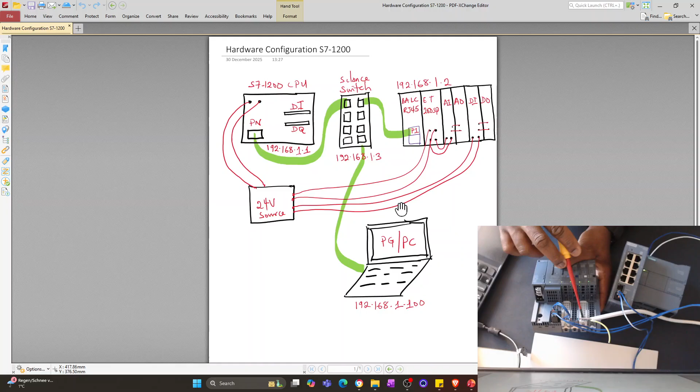So to quickly explain what you see on the ET module, there is a 24-volt external power supply coming to the main module, this guy, and I'm able to loop power supply from this to this white base station. This white base station then supplies the dark base station, so I don't need to connect power supply to this. I also have another 24-volt power supply connecting to this white base station, and then this white base station connects to this guy.

These remote I/O stations are connected on the side, and there is this device which terminates the bus line. This is a server module. It terminates the system. It lets the device know that this line is complete. We're no longer connecting any other thing. You see, when I remove the device, now we have the red light blinking on this module, which is saying something has been removed on the line.

So these devices are connected on the side. I'm not supposed to remove this while it's powered on, but because I wanted to show you, I'll just do that. So this guy connects to this guy, and that's how the power is from this. You see these three lines? The power is connected from here, and data information is connected from this top part of the module.

Because we have power supply connected to these guys, you can see that there is a power light on here. There's power on, and because this guy shares power with this, there's power on here. If I take out the power supply from this guy, see, the power light goes off, which means this line, these two bases do not have power supply.

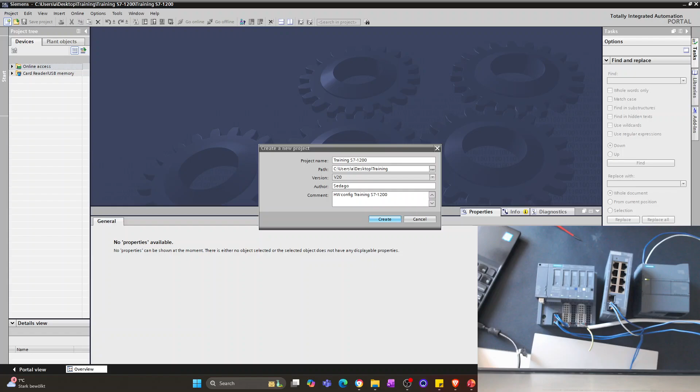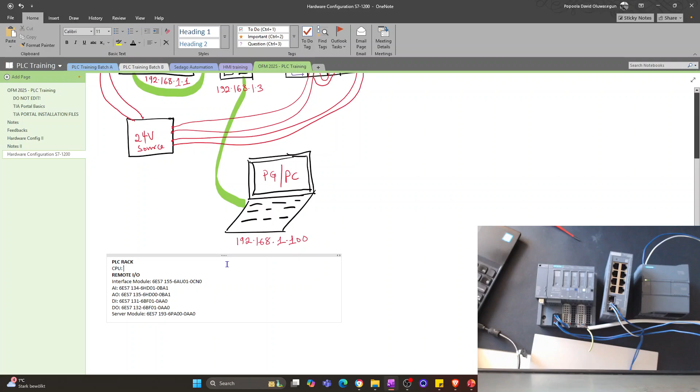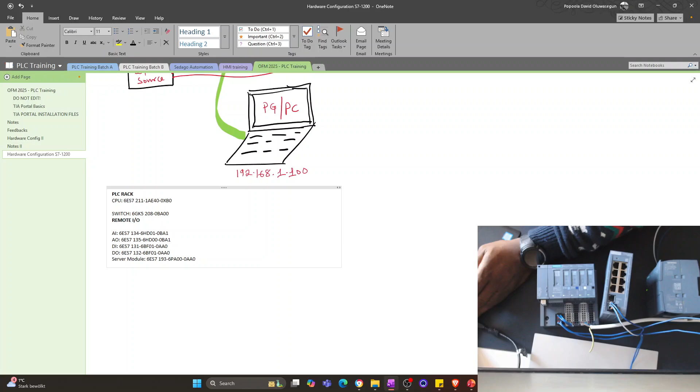Okay, so we have our system right there. I want to open this file where I've already tried to copy the order codes which we would use. So I'll just quickly show you that here. So we have our CPU, the remote I/O, and interface modules, and all of the devices are here. So I'll remove this. Our CPU order number, I'll just quickly type this in here: 6ES7 211-1AE40-0XB0. And then the switch, 6GK5 208-0BA00-2AB2.

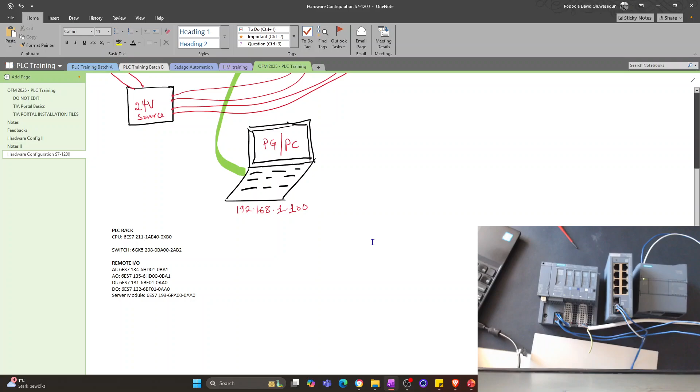In some cases, you could have the devices in front of you like this, and you have to do the hardware configuration. For example, if you're standing in front of a control panel, you have to read out the order number on each of the devices. In some other cases, you have a wiring diagram with all of these numbers, and you have to figure it out. Just like I've drawn it like this, a wiring diagram can show all of this with the order numbers, and then you have to program that. I've also included some IP addresses here. We'll get into that soon.

So let's go into our software to program. One of the first things we need to do is add new device. We know it's an S7-1200. We can directly search for it because we have the order number, right? So what we have here is DC/DC/DC, so it should be somewhere on this line. Then I'll confirm with the order number we have: 211-1AE40. This is it.

We need to be sure this is 211, right? Here is 212, so we should be somewhere here. Yes, should be this. If I click back on this, 211-1AE40-0XB0, yes. On the description, it tells you basically everything this guy can do. You can also check the version which you want to install. I'll just go ahead with the latest version 4.7, which the software has given me. So I'll click on OK.

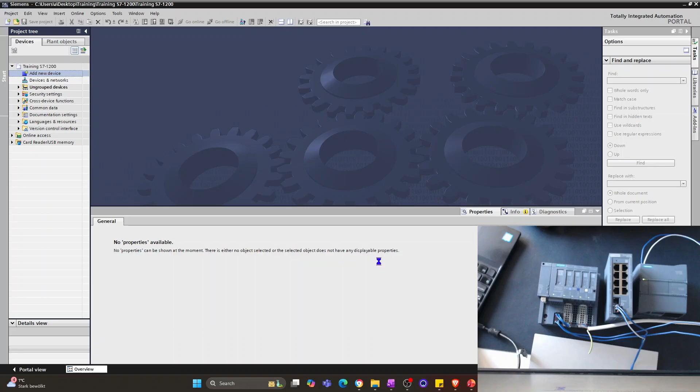And then it will add the device to the system. It will create all the properties of physical devices that the PLC can connect to. It will create the hardware catalog of the devices that can connect or work with this PLC. Basically, the software will prepare the environment for me, which we can use to program this PLC itself and everything else that can connect with it as well.

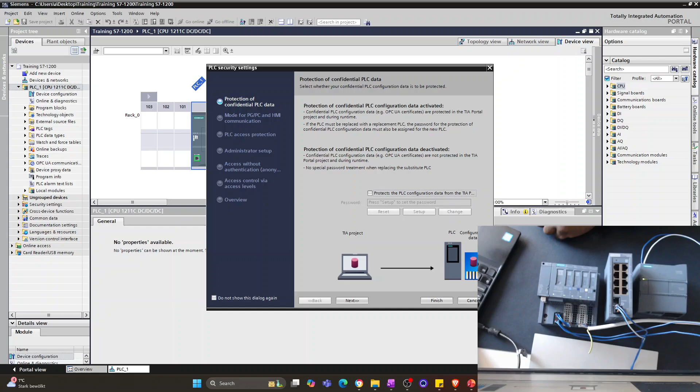Okay, good. So we have our PLC, and then once again it comes up with this: protect PLC configuration. So I basically click no, I don't want to protect the PLC configuration. We had this in one of the classes earlier, and there we needed to protect the PLC. There we showed how to protect the PLC. In this case, I don't want to, which was one of the issues some of you had.

Mode for communication, only allow secure communication, fine. Enable access control? No, so just disable access control. It will delete all online user management data on the PLC. Yeah, I don't want access control. Just allow people to be able to access this PLC, for training purposes, right? I don't want any administrator setup. Access level: full access, no protection.

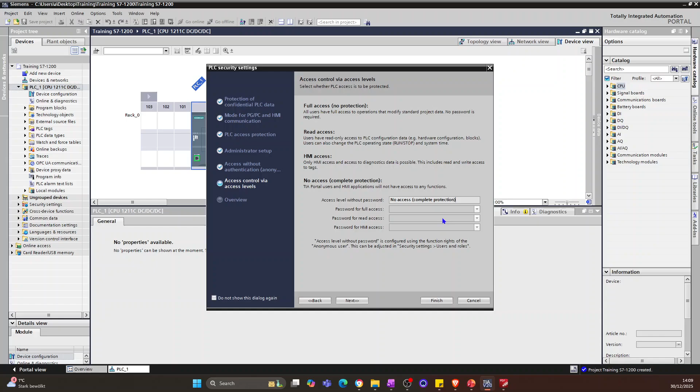TIA Portal users and HMI applications will not have access to any function. Password for full access, password for read access. Let's continue. I don't want any. Finish. So we have our PLC. It goes back to this protection. I don't want any protection. So let's see what that gives us.

Like I mentioned when we started this series, this is my first time using version 20, so we will be learning some things together. Like I usually say, it's best that you name things, because once you start programming, those names will help you. There are some higher level programming tasks where you need all of these names. You need port names, different naming. So tags, putting names on devices really helps.

So I'll just quickly name this as our S7-1200 training PLC. So that's named. We have a PROFINET interface, just X1, right? I'll name this interface as well. Usually I like to do that. So we can say PN, or we can say CPU PN X1. Now, new subnet. So we want to add a new subnet. I'll show you what this is later.

IP address. Let's check in our documentation. What IP address did we decide to use? 192.168.1.1, subnet mask 255.255.255.0. Yes. Generate PROFINET device name. Everything else looks good for now.

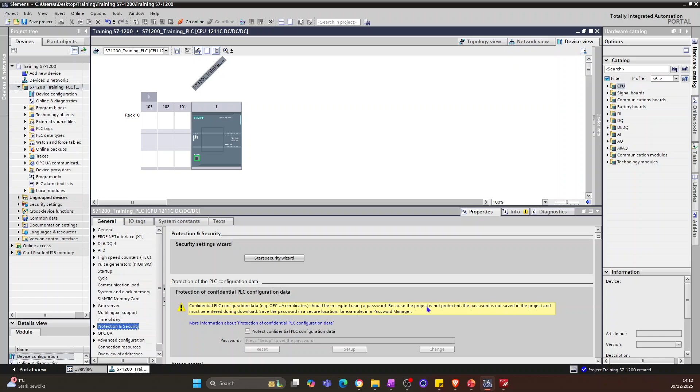Multilingual support and then time of day. I always advise you use the time of day for wherever you'll be using the PLC, because it helps. Protection and security. Again, it's saying confidential PLC configuration should be encrypted using a password. Because the project is not protected, the password is not saved in the project and must be entered during download. Okay. So, protect confidential PLC configuration. Let me just do this setup. I'll just enter something, at least 10 characters. Again, I don't want to do this. So let's see what happens. I don't want to do that.

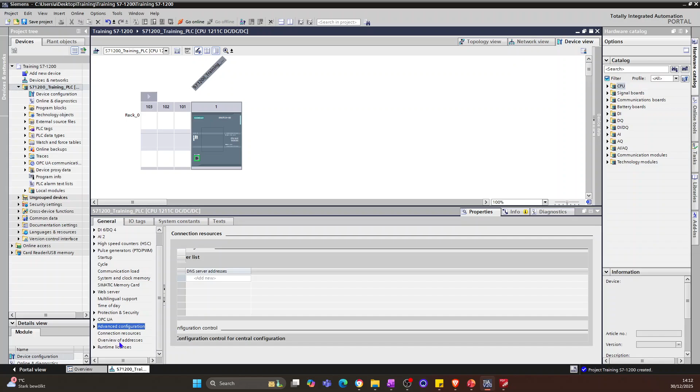OPC UA, yes, let's activate the OPC UA server. Probably we might come to this in future trainings. So I'll say yes, activate. Advanced configuration, for now just leave it. Connection resources, overview, and then runtime licenses. Of course, because we've enabled OPC UA, we need to mention the type of license. Here it says basic, so just give it basic. It's usually available over there. I think for now we have the majority of what we need to configure.

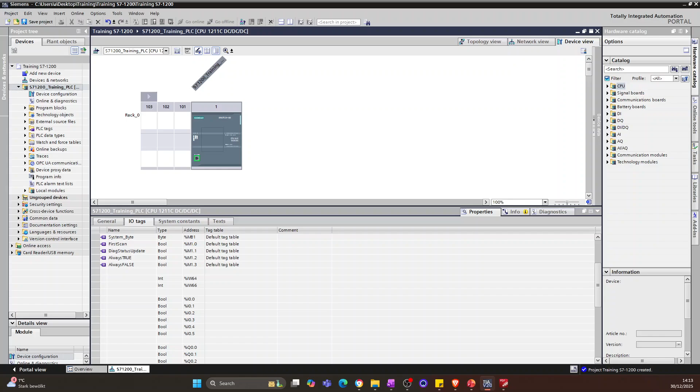If you look at the IO tags, it shows you the clock that we enabled. This is the address that's generated automatically for our analog input addresses, the analog input that comes with this PLC itself. Also, it's generated some addresses for our Boolean inputs, which is 1, 2, 3, 4, 5, 6. These are the outputs, 4. So we have 6 inputs and 4 outputs, basically. We will come to tag tables and all of this later. I think for our PLC we're fine.

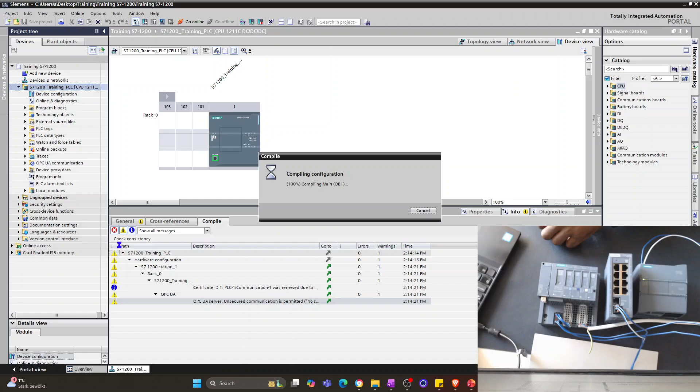So one of the first things we'll do is click on this. Let me expand this a little. Click on compile to see if everything we've done works, and then we'll keep an eye on the info table to see if everything looks good. Like I usually mention, these 3 icons are enabled so I can see errors, warnings, and information. Currently, 0 errors, 1 warning. The warning is that unsecured communication is permitted. Fine, no security is activated. PLC communication was renewed due to changes to the hardware. Fine. So everything looks good for now.

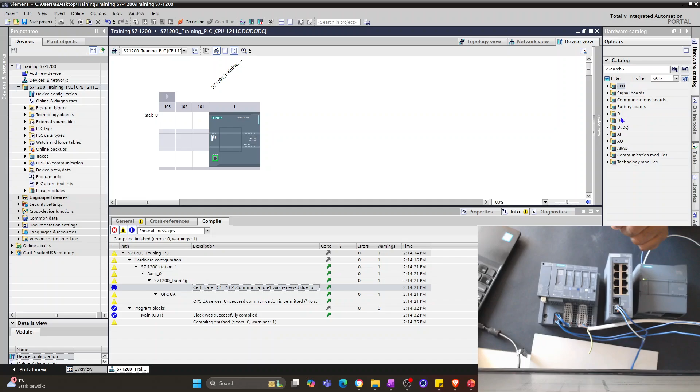Now we have to add these other devices, and because we will be connecting to them using a network connection like we've shown here, I'll just go to the network view. In the network view, you see a different view of the PLC. Again, let me go to the device view. On the device view, you see what we can see here in the catalog. It's showing us the CPU, communication boards, digital input, digital output, different devices that you can add on this rack.

However, when you go on to the network view, it shows you what can be on the network with this guy, not on its rack. So for example, when I go to the network view, it shows me the PLC, which is currently sitting alone. And here you can see all other catalogs. Let me close this. You can see that what you see here is different. Let me switch so you can see it properly. This is what we see when we are on the device view. When we're on the network view, this is what we see: things that we can connect to this guy using network.

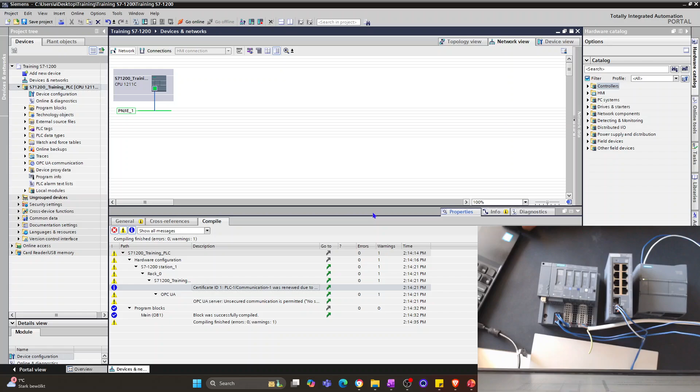So first, I mentioned when we created subnets that I will come to this. So the subnet really shows up when you get into the networking process where you want to network the PLC. Like I mentioned, I usually like to name things. So I'll go ahead and name this subnet which I've created. So I can say CPU subnet. Just name it directly like that. Basically, that's all I just want to do here. Every other thing for now remains the same, right? So here you see the CPU subnet.

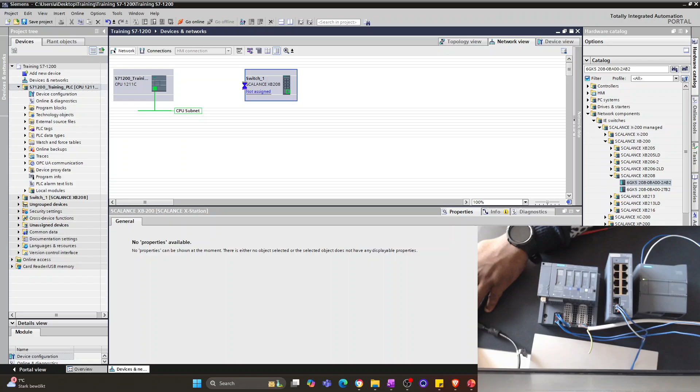Yes, so we find it. So I'll add it. I'll just put it on the network there. Okay, so it's there. And now we have our switch. So let me name it, right? So let me say network switch. We know it's a network switch, but I just like to name things, right? Good. When you click on this again, you can also name it however you want. So let me just say Scalance switch. I have a spelling error right here. Yes. Enter. So we're renaming things now. See? Yeah, Scalance switch. And it's telling us the type.

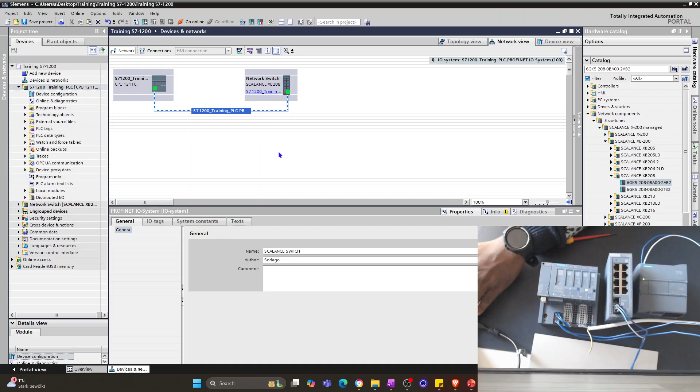So here it's telling us that this guy is not assigned to anything. Nothing is managing it. So here I want to assign it to a controller. Of course, I want it to be controlled from this PLC. So I'll just assign it to this. And when I click on that, it generally automatically enables a connection between both. Now, if you look at the PLC and the switch, there is no physical connection yet, right? But in the software, it already tells the switch that the switch will be managed from this PLC.

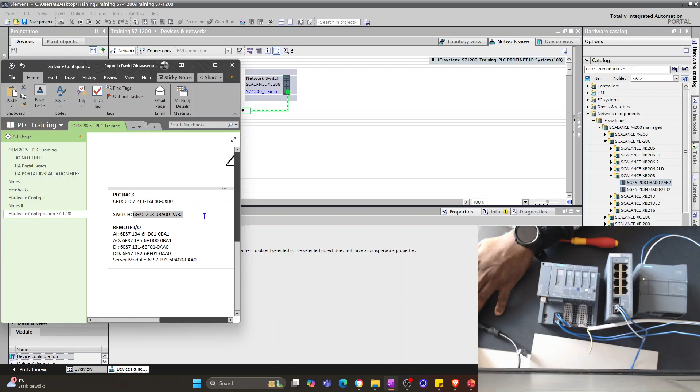So that's fine. We're still on the network view, and now we want to add all of this, guys. So I'll just put this somewhere where we can do copy paste so that we don't take a lot of our time. Okay, let me put it on another screen. Yes. Okay, so our interface module is this. I'll copy and paste it here, search for it. We want it on the network. Good, we have it. So we add it to the network. Good. And then we have it here.

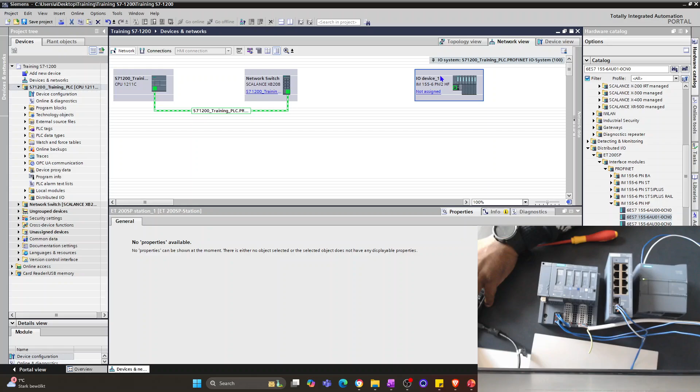So when we go inside of this device now, because we want to walk inside this rack, we're going into device view now because we now click on this module itself. That's what we've just clicked on. What I have in front of me is actually not PN2. On this software, I see PN2, but what I have in front of me is not PN2. So let me search for what I have. 6ES7193-6AG20-0AA0. Okay, let's look for this. It's here.

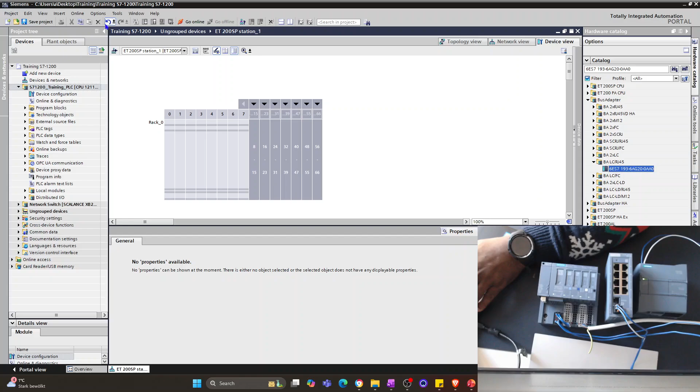So let's see if I remove this, delete. Yes, actually, this is what we need. Oh, hold on. No, I should be able to. Yes, this is what we want to change. This one, not the module. See, it doesn't work with the module. We only want to change this. So when I drag this here, it's showing, do you want to swap? I just drop it in and it comes with this interface. Is this what you want to change it to? I said yes.

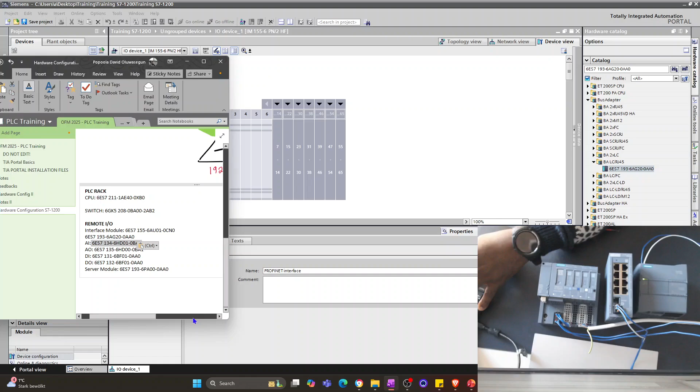So what I'll do now is click on this. Let me copy this number and put it on our document. Okay. Now we want to add the first module here, the analog interface, which is what we have here. Control C, Control V. Okay.

Six HD01. Yes. So it tells you you can put it anywhere between 1 and 6. If you also expand this, you see, you can put it anywhere here. But we'll just put it on the first because that's what we physically have. It shows us a white base. If you look at the image here, it's a white base.

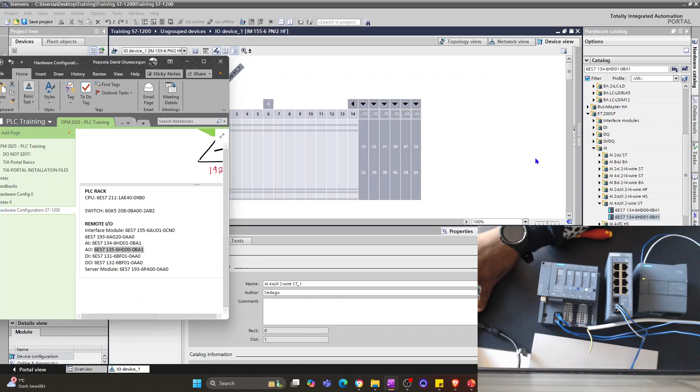We go to the next one, the analog output. This, we'll put it on the second position. It shows us a dark base. If you check here, it's a dark base. We go to the next one, digital input.

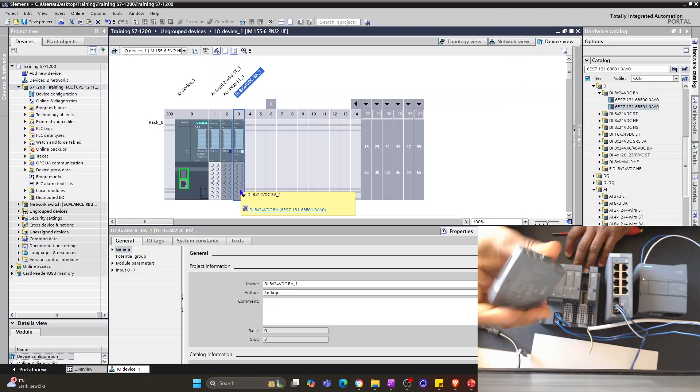Do you want to continue the search from the start? Yes. So it has to go back up and look for it. It finds it. It shows us a dark base. However, what we have here is a white base. You can see. Because actually what you're configuring is this upper part. These are the modules that you're configuring and the base is automatic. But you can decide what base you want to use based on how you want the power distribution to be.

So we have configured this. However, on site, what we have is a different base, right? So I'll go into this module and click on potential grouping and say, I want to enable a new potential group, which is a light base unit, not a dark base unit. So I'll click on this. It also tells the device that it should expect its own 24-volt power supply connected to it, which we already have here.

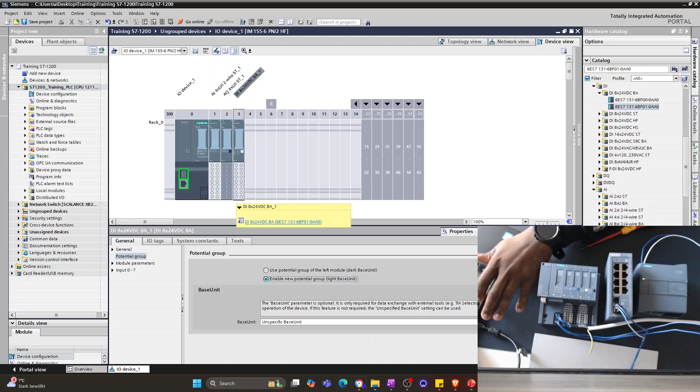The next one is our digital output module, which goes on 4. Now we need to close the system. We need to close the line using our server module, which is this last small device that sits here. Server module, then we'll put it there. Perfect. So we have the rack complete.

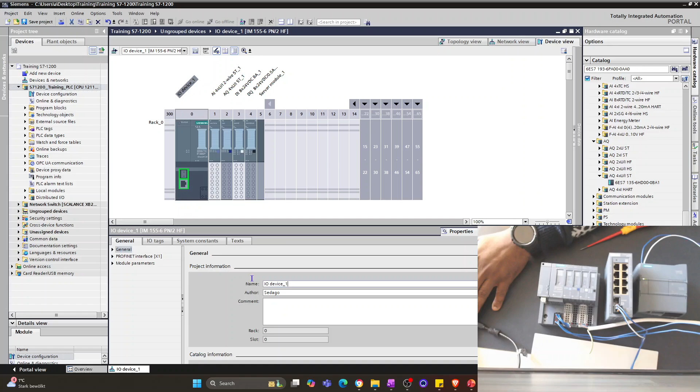Now we want to name things like I usually do. So we can just say remote IO for this. Profinet interface. So we say remote IO PN X1. Okay, we don't need a new subnet for this because in our drawing, everything is connected to the PLC via the switch, right?

So if we had a different networking port, then we could as well create a different subnet for it. But because it will be on the same subnet, this remote station has the same subnet, 192.168.1.2, with the PLC 1.1. So we can directly just click on this and go to the CPU subnet. Now it gives it 1.3, but we want it to be 1.2, which we can change. So it says the address is not unique. The next free address is 1.3.

Now I'll go to the network view to check. You can click on this icon to show you the IP addresses. So the switch takes 1.2 because we configured the switch, the Scalance, before the remote IO. So we can leave it at that, or we can also change it. I want to change it so that it can follow our hardware configuration.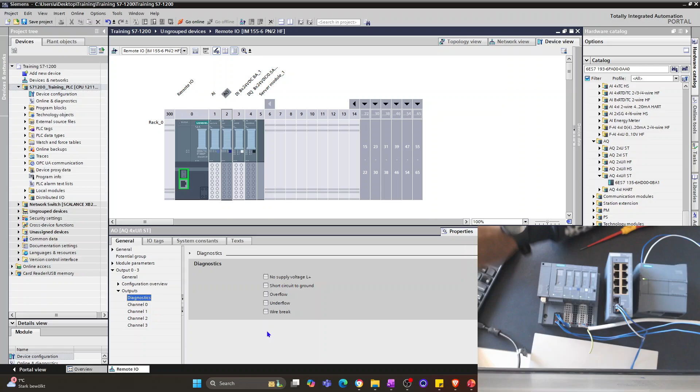It's also asking you for each channel: what happens in case the PLC stops? You have 3 options. Should it shut down? Should it keep the last value? Should it output a substitute value? Depending on whatever you want. When you start programming, you will understand what to do with all of this. But for now, we'll just keep it at shutdown. Do you want diagnostics? If there is no supply voltage, if there is a short circuit, overflow, underflow, wire break, all of these are very important. For now, we'll leave it the way it is.

So this is an overview of this card. The first two channels are voltage, the last two channels 2 and 3 are current, 0 to 10 volts, 4 to 20 milliamps, and we've said all of them should shut down. We'll go to the third card, which is a digital input. General, we also change the name. It's a digital input card. We have our input modules. You also have your inputs here, diagnostics, channel 0, basically whatever you want to set. From template, from manual, just leave these ones as they are. I'm not enabling any diagnostics for now because I don't want anything out of the ordinary.

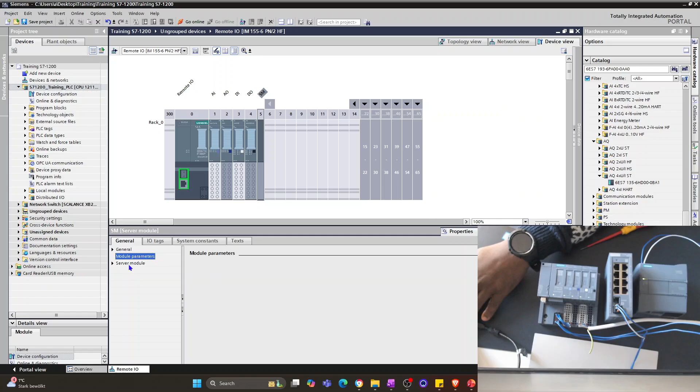Digital output, we've already set the potential group. Then we'll go to the server module and just rename it as well. And everything looks clean now. So on the overview, when you look at the rack, you can directly see AI, AO, DIDO, SM. When we go back to the networking view, this is also not assigned. Now we will assign it to the PLC so that the controlling comes from the PLC. For now, it looks like we have everything we need for our configuration.

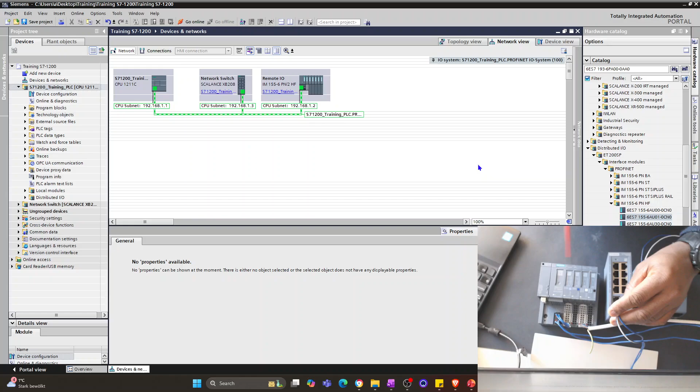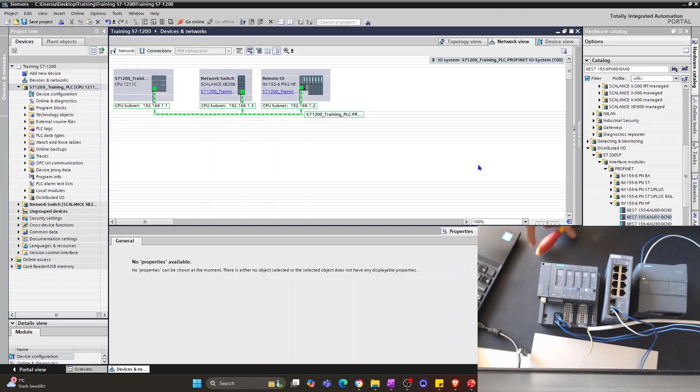You can see on the field, you see some green lights blinking here, right? A lot of green lights blinking here. There is no power on this currently. I don't know why this is not working. I'll check it now. There's a green light blinking on this, telling you that maybe it's expecting some configuration, or maybe a network cable is pulled out because maybe it's been configured before. This is green, so I would assume there are some connections, some configuration currently running on the PLC. So let me quickly fix this and see why it's not powering up.

Hi, so I already fixed this; I basically had a wrong power connection. That was the main issue. Now we'll go ahead and connect all our devices together using the diagram we have here. So what we have here is our CPU. I'll remove this cover so you can see directly. We have our CPU connected to the switch. I'll connect to port 1. Now the PN lights up. We start seeing some blinking there, which shows that there is a physical connection. It doesn't mean there's any configuration happening there. It just shows there's a physical connection.

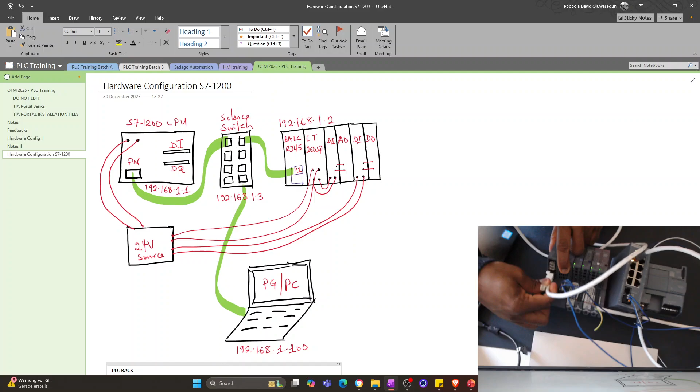And also we'll connect our remote I/O, which is usually sitting somewhere far away from the PLC or the switch itself. And then we'll connect this to port 0. So keep your eye on this. There are no lights blinking here currently, and when I connect this, we also start seeing some indication that there is a connection. So what we have to do next is to connect our PC to this setup. So our PC goes in here, then I'll connect this on my PC.

So from the configuration we have here, everything is on the subnet of 1. The subnet is the third part of your IP; the first part is 192.168, and then the third part is this, in this case 1. So I'll set my PC to that same subnet. How do you do that?

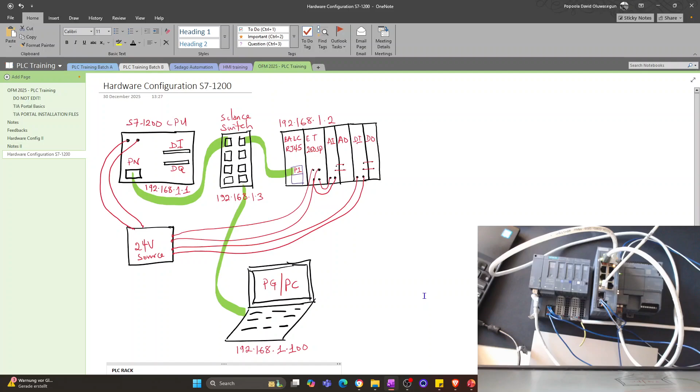Let's go here. You click on this and just type Ethernet. So I'll type Ethernet settings and check what are the settings on my PC right now. So my PC is currently on subnet of 3. I'll change that. I want it to be 1. And we said it should be 1.100, so that's fine. Save. So I'm setting my PC to 1.

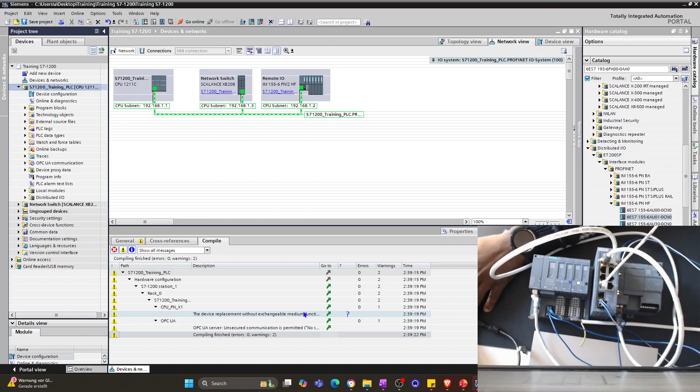Now, one thing I need to do now, I haven't saved this. Let me save this and compile. I do a right click, compile, hardware rebuild all. So it rebuilds all the hardware configuration that we've done, checks if everything we did was fine. It says everything is fine, 0 errors, 2 warnings. That's fine. Before we download this, I just usually do a check first.

And one of the checks is to see what's on the network. What are the IP addresses of this guy? Maybe currently they have IP address. What is it? There is a program called PRONETA. It's also made by Siemens. So you can also download that and you can use it. It's free. With PRONETA, you can scan the network which you're connected to, and it will show you all Profinet devices on the network.

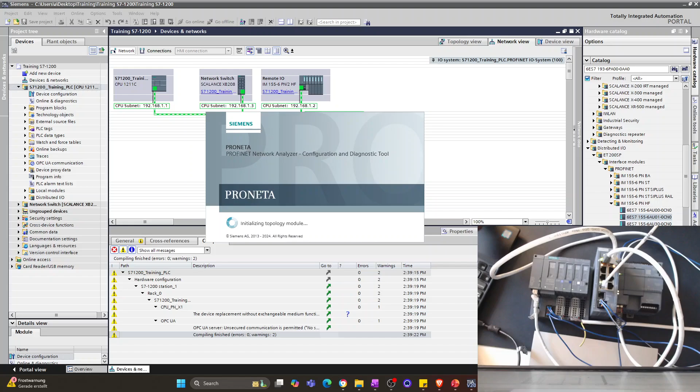This helps me to know if these guys currently have some IP addresses that might be different from what we have configured on the project, which would help us to reconfigure the IP addresses so that we can download this configuration to these devices. Because if they have a different IP address, we might find it hard. Another thing that you can do from within the software is you can also go here

and say you want to check online devices. Here. So if you say you want to check online devices, I know I am connected on this connection, and then you say update accessible devices. So within the software, it can also do a search to check, okay, you're connected here and there are some devices connected. What are those devices? So you can see it shows you, okay, now I see clearly that this PLC is not on subnet of 1. It's on the subnet of 0.

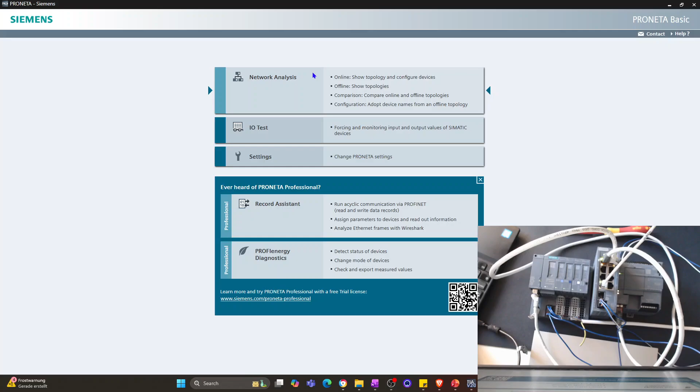Of course, from within the software, I can also do online and diagnostics, which would help me to do two things. I can change the IP address from there. I can also change the Profinet name from there. But I want to show you one of the tools which we use on site. It's called PRONETA. So PRONETA is a network analysis tool which actually helps you to do quite a lot of things. In this case, you can see what it's showing me.

So this is what it sees on the network right now. It sees a PLC which I have named home_s71200. It sees something called remote IO. It sees the switch. The remote IO do not have IP addresses. The S7 has IP address. So I can change this IP address and say I want it to be 192.168.1.1. If I click on enter, it says, do you really want to set the IP address? Yes, I want this PLC to have that IP address.

So let's see if it sets it. I don't think it did. I'll try again. 192. Why is it? Okay, yes. 192.168.1.1. Enter. Yes. Okay, so it looks like that didn't work. I'll refresh this to see. So basically it looked like it didn't work. It's still 0.3. Scalance switch is this. Looks like this is what it says.

So we can go back into the PLC. I'll go online diagnostics with this PLC. Hopefully I can get a connection to the PLC. Yes. First, let me see if I can set time to be sure that I'm connected to it. So I'll say apply. Yes, so now it takes the timing from my PC. So now I can go into IP address and see if I can set IP address 1.1. Assign. The set command could not be executed. Okay, looks like that didn't work.

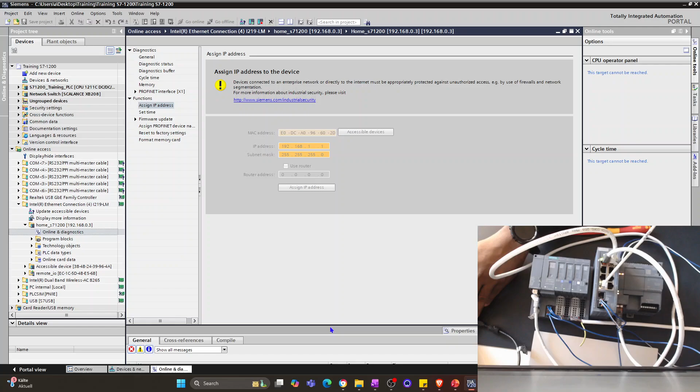1.1 assign IP address. So this is one of the challenges you would encounter as a programmer, as a control engineer, when you start going into that IT space. So in this case, it looks like we were able to transmit the parameters. Parameters were transmitted successfully. Let's check on PRONETA now.

Good. So it's changed. We've been able to change the IP address. Now let's go to PRONETA device if we can do that. It's not giving me the option to do that. Okay. It's not giving me the option to do that, but fine.

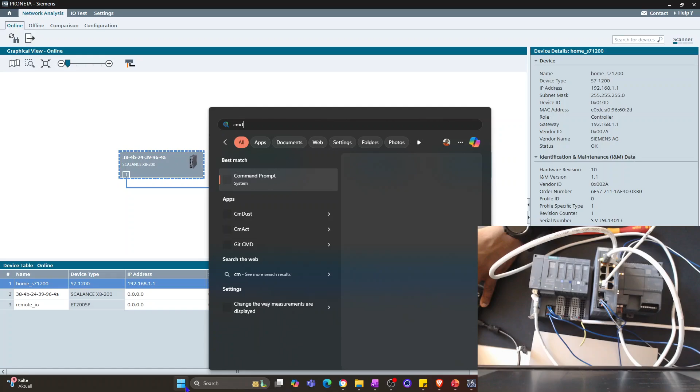Now that we're sure that the IP address is fine, let's ping the PLC to see if my laptop can communicate with the PLC. I know the PLC is now 192, so I say ping. I open CMD command prompt, ping 192.168.1.1. Enter. Fine. So we're pinging and we get replies from the PLC, which is fine.

Now let's go to the remote IO. Are we able to also change this IP address? Let's try 192.168.1.2. The remote IO is 2. Enter. Now this is green. The PLC is green. These ones are still blue.

That didn't work, I think. Okay, it worked. We're good. I can also ping to be sure. That was 2. Good. So we can now communicate with this remote IO station. Very good. Now let's go ahead to change the Scalance switch.

192.168.1.3. And then this is, yes. Good. So we have the Scalance switch as well. So let's ping the Scalance switch. 3. Good. So our laptop is able to communicate with all 3 devices because we've set the IP address. And now PRONETA sees the correct configuration, how we are connected.

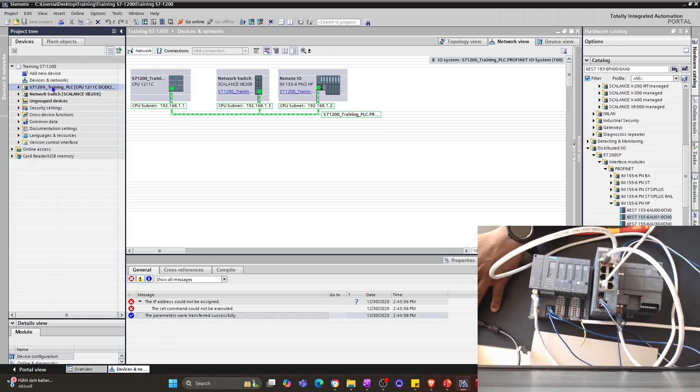So what can we do now? Again, let me see if I'm able to set. Okay, no, fine. So let's go back away from online and diagnostics and let us see if we're able to download this configuration: compile, download to device, hardware and software.

Okay, so it's asking where are you connected. So I wanted to show all accessible devices. I wanted to also check. Okay, we're on the CPU subnet, right? Because we're connected. Okay, this cannot be modified. Fine, as long as it can see it. So I'll just say direct at slot 1. Let's search. Okay, it's attempting to. Okay, refresh.

Incompatible firmware. Fine. So we have an incompatible firmware version. Great. So how do you fix this? I like when these issues come up during trainings. So it tells us directly that S7-1200 has incompatible firmware. And let's check that. We go back to accessible devices, update accessible devices. We can see all our IP addresses have changed.

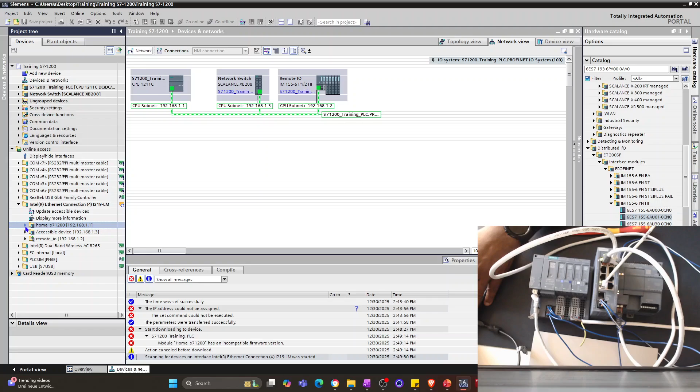We go into the PLC directly. Then we go into online and diagnostics. This is a very good part, and I wanted to show you this as well. I thought we could do this on another training. So we go to functions, and then we go to firmware update. Here, it shows that the online firmware is 4.4.0. This is the firmware we have currently on the PLC.

However, in our configuration, let me see what we have. So I can split the screen. Okay, again, I'll go to device configuration. Yes, so I click on this, properties, and on the general, we can check. So our firmware, which we have configured, is version 4.7. However, what we have online is 4.4, which means, of course, we need to update the firmware of this PLC, or we downgrade the firmware of our configuration.

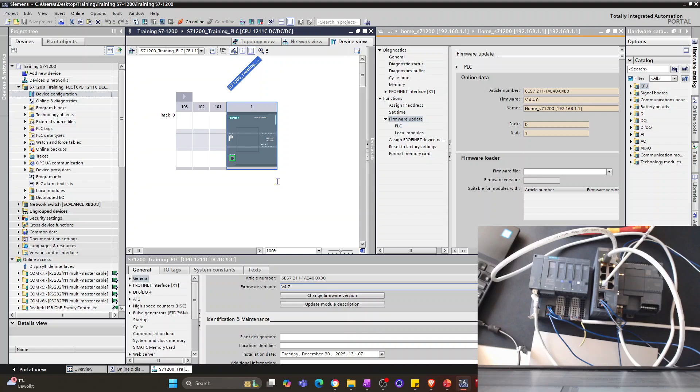Do you understand? So we can directly go to change firmware version of our configuration and look for version 4.4. This is our current device which we've configured. We can directly go back to 4.4, which makes everything fine. Or, yeah, so these are the functions that come with the 4.7. It's telling us here if we change this. So if I go to 4.4, for example, it will tell you all the things that will change. See, there are quite a lot.

So it means version 4.7 has all of these features. And if we downgrade to version 4.4, we would lose all of these features. So I'll say no. We want to keep version 4.7. So if we want to keep version 4.7, then we need to update this PLC with version 4.7. So how do you do that? Very good. This is one of the reasons why I told you to register on the Siemens platform. So I'll copy this article number.

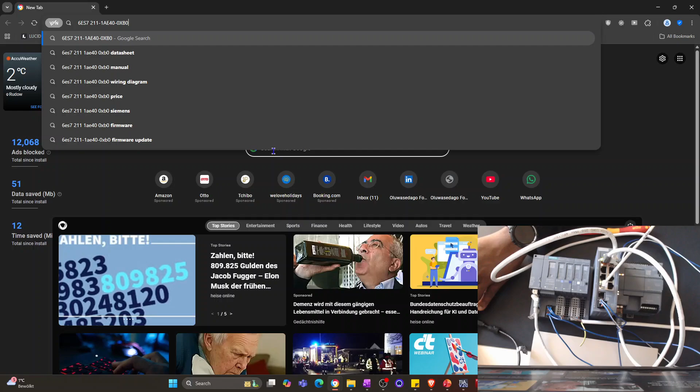I've copied it. I'll go on the Siemens platform, and then I can just type the article number and say firmware update. It directly takes me to the Siemens portal where I can get the update. But before you can get the update, it's showing me in German, of course. Let me register, let me log in.

So right here, I'm logged in. And then we see all the firmware versions which we can download for this PLC. I'll go back again to confirm what we have on this guy. We have version 4.7, just 4.7. And on the web, we see different versions. There's 4.73, there's 4.70. So let me download 4.73, which is the latest. So I'll download that.

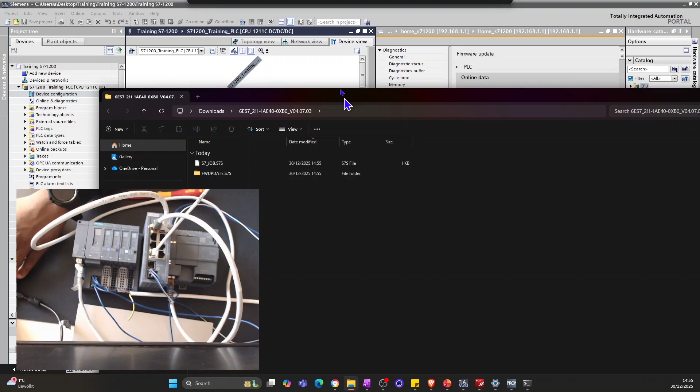So we have the file downloaded. I'll unzip the file. Okay, so we have the file downloaded now, and I can go ahead to pick the file. So let's go firmware file, downloads. So it checked. Okay, does this look good? Now we want to run update.

The firmware has been loaded on the PLC, and now it's being activated. So we'll wait some few minutes as well for this to complete. Okay, we're back. The PLC's firmware has been updated. As we can see now, it's 4.7.3. However, the IP address has changed back. So let's see if we can change that again.

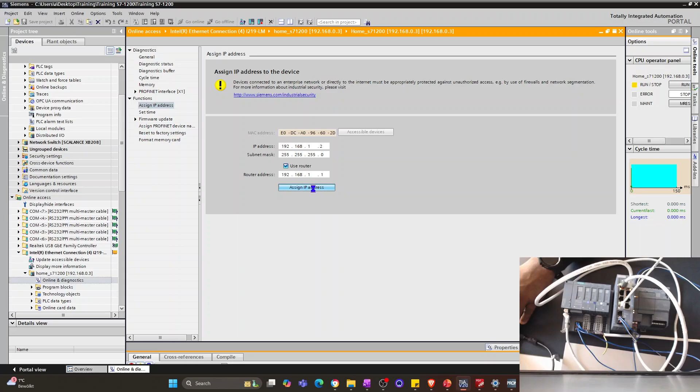And we can confirm using PRONETA to see. Yes, so it's 1.2, shows 1.2. We can also ping it. Yeah, we can get data. So fine, everything looks good again. So now let us see if we are able to do compile and download. So hardware and software only changes.

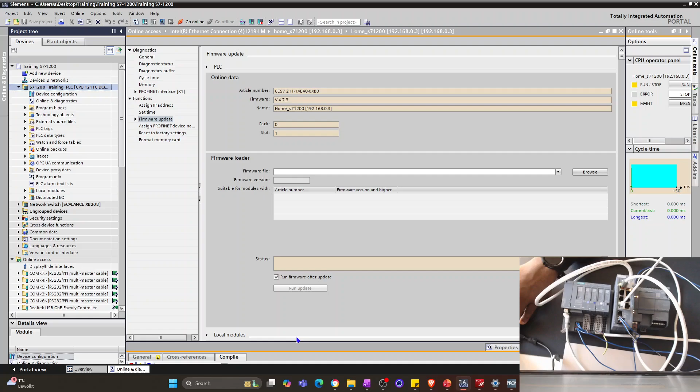And then save this. We don't have any errors, I presume. No, we don't. So let's see, download to device. Hardware configuration to device. Let's see how that goes. Okay, reset module. Delete all. Work and load memory will be deleted. Yeah, delete all. Yes, I think that's all. Yeah, load. So let's load our configuration on the device.

If this were a PLC that had its own HMI in front of it, like the S7 1500, you could see the current status, which would read downloading to device. And then you can also monitor from its local HMI. In this case, the S7 1200 does not have its own HMI, so we can only see everything through the software. So if you were standing in front of this PLC right now, you wouldn't know what was ongoing.

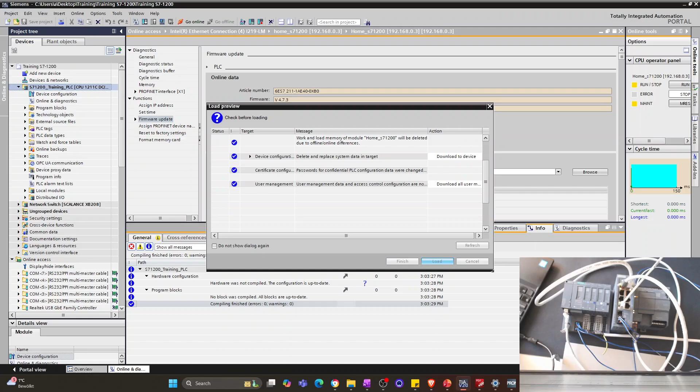Okay, so I needed to show you this because it says it's not able to download to the device because it's unable to reset the module, right? So what I'll try to do now is to see if I can do the reset myself. I'll go to online and diagnostics. So the reset it's talking about is the user program and everything that is currently sitting on this memory card that is on this PLC.

So I hope you can see this. So it's talking about the user program on this memory card. So let's see if I'm able to reset that, and usually that's what blocks the download most times.

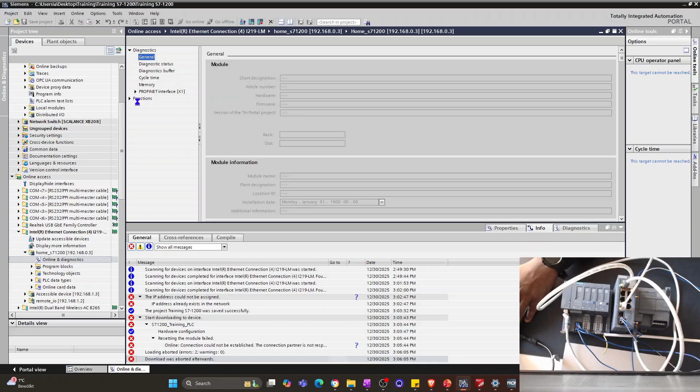So here I have navigated to the S7 1200 PLC, and here on the format memory card, I want to format the memory card so that all the settings on the device can be cleared, which would then allow me to load my configuration. Usually you're not expected to do this. You don't really need to do this often.

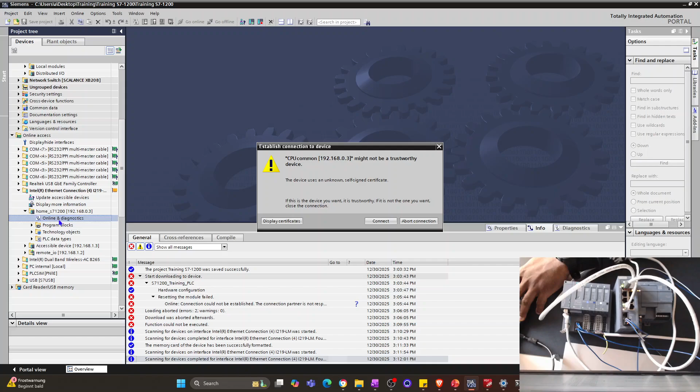I think I'm doing this basically because I've been using TIA version 16 before now, and this is the first time I'm loading TIA version 20. So a lot of changes have happened between the softwares, and the PLC is currently confused. Let me see if I can connect to the device again. Update accessible devices. I'm kind of baffled that it's still showing the old IP address, even though PRONETA was showing that we already have the new IP address on it. So I'll just check again.

Functions, IP addresses, 1.1. Yes. Yeah, 1. Don't use router. No router. Yeah, the PLC is 1.1. Yeah, transferred successfully. So update accessible devices. Let's see if it's changed. Yes, now it's changed. 1.1, correct.

Now, let's see if we're able to load configuration on this device. Let's see if that works. Download to device, hardware configuration. The IP address of the device does not match the IP of the device. Yeah, so I still want to connect. So connect. Download to device. Yes.

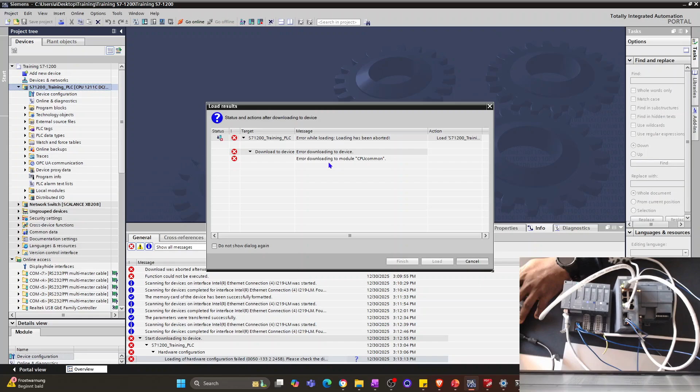Still not able to download to the device. Error downloading to the module CPU common. Okay. I don't see any CPU common here. So I'll do some troubleshooting and share what I find with you.

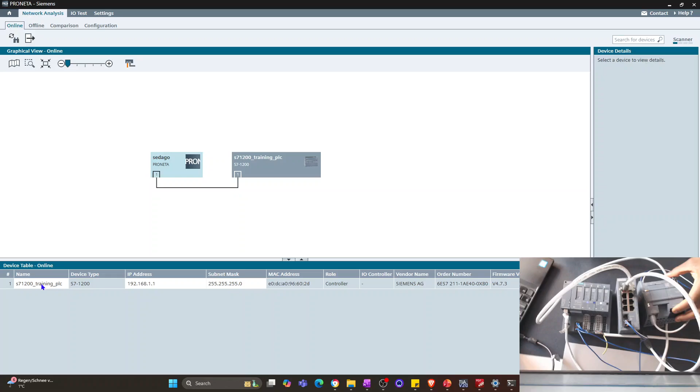So I connected my laptop directly on the CPU. I removed it from the switch, connected directly on the CPU, and then I loaded the hardware configuration to it. Now I can say start module and see if it will start. So it's currently trying to start. It's loaded the hardware configuration. It's trying to start. So it's running, but you can see some error here.

And it's showing those errors because, of course, in the hardware configuration, we have some network on the line. So it currently cannot see this guy, it cannot see this guy, because in the hardware configuration, it's there. You understand? So it will show you which one is green. The PLC is green, but it's showing us that we still have some errors here.

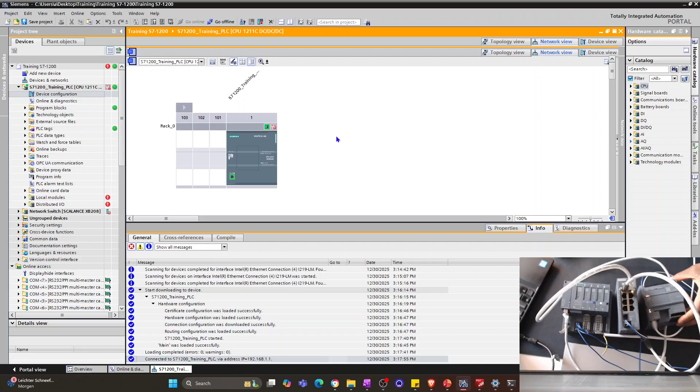You see, if we go to the network view, it will show you the devices that are okay. It cannot see this guy. It cannot see this guy. It shows that this guy is running, but it's running on some kind of mode. So I'll go offline, return my connection to the switch now.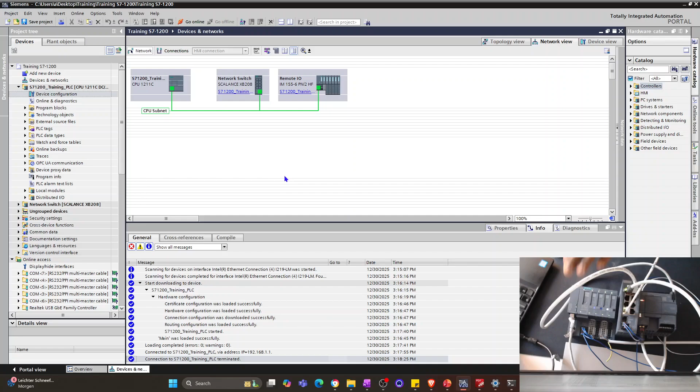So all the connections are the way they are supposed to be now. However, I still need to transmit the hardware configuration for these other guys, which have not been done. But before doing that, let me quickly show you how I did the naming, the Profinet naming. So if you go into your configuration, let me go to the network switch itself, and I'll go into the properties.

Yes, okay, properties. If I go to the Profinet interface, that's where you'll find the Profinet name, which the software generated. So this is the Profinet device name. I'll copy this. I'll go to my PRONETA. Under the switch, I'll just put it here and press enter. Do you want to assign the name? Yes, I want to assign the name, network switch.

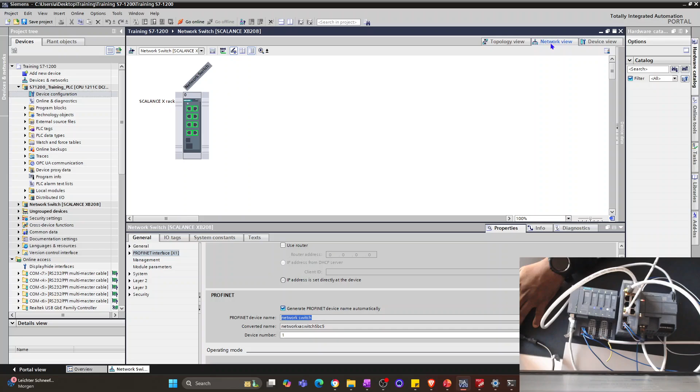I'll also go into my software and go to the remote IO, copy the Profinet name and use that as well. Yes. Profinet name is very, very important when it comes to communication, Profinet communication. So now we've set all of this. Profinet IO names, we've set the name, we've set the IP. Everything looks correct on this part.

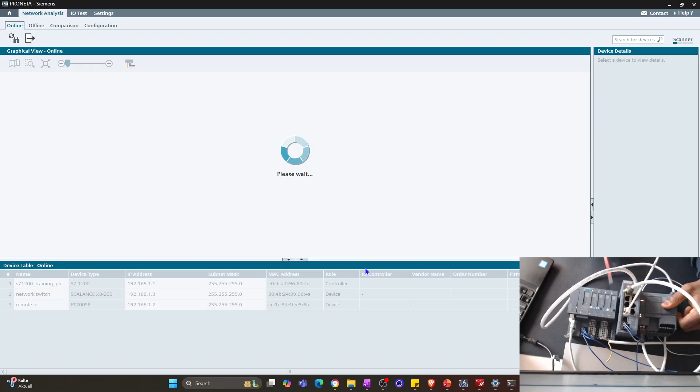You can directly see that this guy has stopped blinking. So it tells you that, okay, fine, it can communicate with the PLC now directly. It tells you that directly. I can communicate now. All the blinking lights have stopped. Now let's go into our TIA portal, network view. Let me download, save, and let me re-download hardware and software. Let's see.

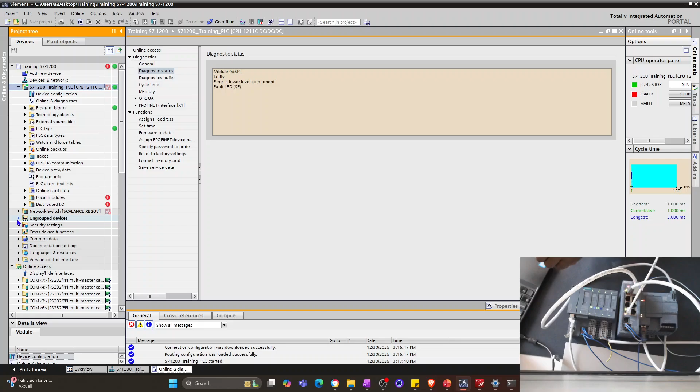I don't see any major error in lower level component fault LED. Module exists, but it's faulty. Okay, so it's saying the Scalance switch exists, but it's faulty. Yeah, so we need to find a way to fix this, but that's not a major issue for us now. So I'll also try and go through this, see how I can fix this and let you know what I find. But basically, our hardware configuration is fine.

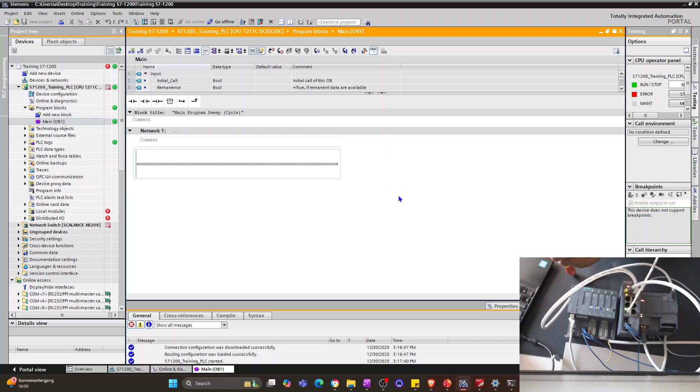We can directly go into our programs now to start writing our programs. As we can see, everything is green except the switch itself. I'll try and get it green. So inside the program, there's nothing written here basically, but we can go online just to see. Yeah, so we're currently online inside this block right now.

Okay, so another issue we have with the switch also has to do with the firmware version. So it says the installed online firmware, which is version 4.2, is different from what we configured, which is 4.4. So what's running on this switch is 4.2. However, in our hardware configuration, we have 4.4. So I'll go ahead, download version 4.4 and load it on this device.

So currently I'm loading the new firmware version 4.4, which I downloaded from the Siemens portal, version 4.4. And you can only upload the Scalance firmware version, not the way we did it from TIA. You have to go into it using the IP address. I know the IP address, which is 1.3. You log in with the standard password, admin username, admin password.

And then on the information, you can see the current firmware version. Then you come to load and save. Here I clicked on load. I accessed the device, the file which we downloaded, and now I'm uploading that. So let's see how this goes. So right here it says the file was successfully loaded. We need to restart the device. I said yes, okay. So we're restarting the Scalance switch now.

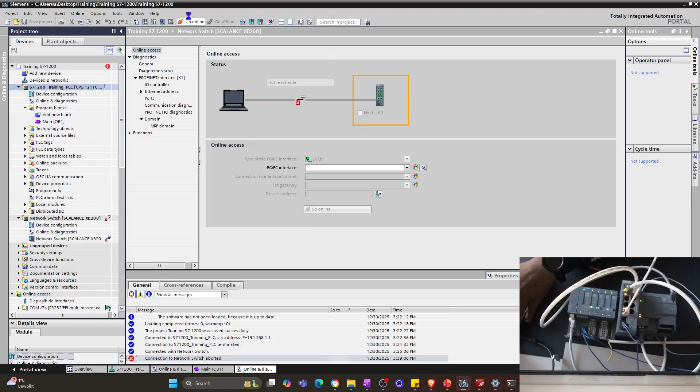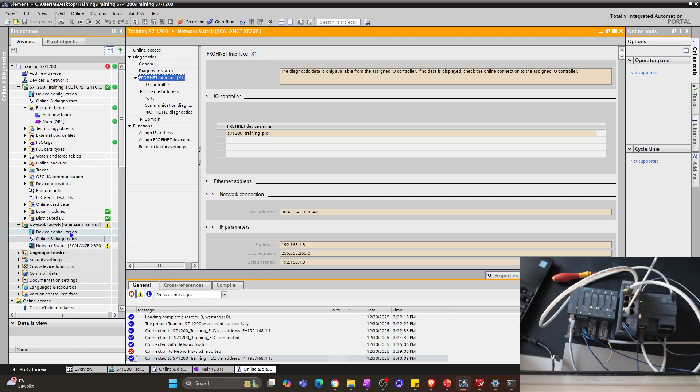Everything we see here now shows green, although we still have some information to see. The firmware is now 4.4, so we look good with the firmware. Do we have any issues? No issues. PROFINET interface, everything looks good now. So basically everything looks good. We have green, and although we have one red here, let me see online and diagnostics if there's any important thing to fix, which I doubt. Module exists, okay. Diagnostics buffer, yeah. Session authentication successful. Yeah, for now everything looks very good to me.

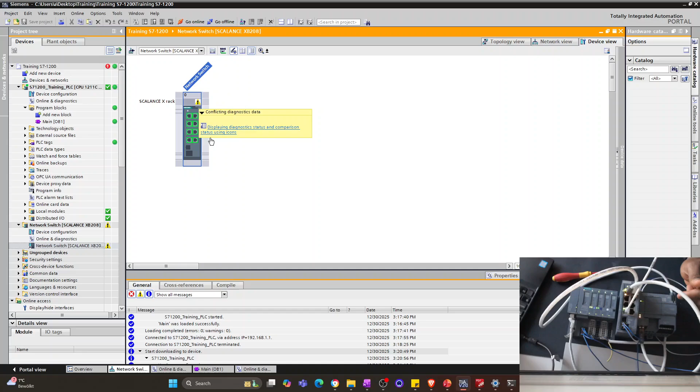Okay, so connection to switch aborted. Yeah, we only have one small indicator here, which I currently don't know what this is, but this doesn't affect... conflicting diagnostics data. Okay, so basically it's just conflicting diagnostics data. So I would assume that if I reset all of this, if I set power on and off on all of this, all these issues should go away.

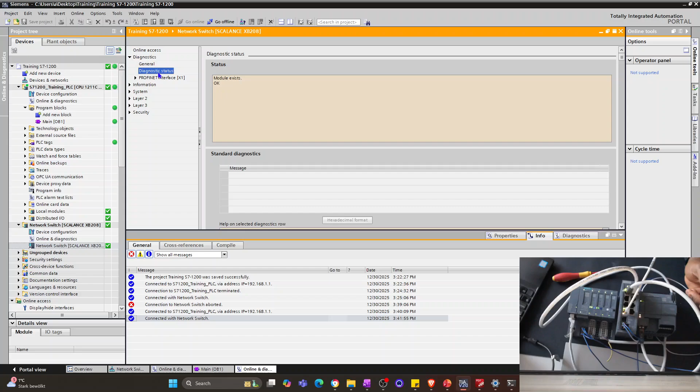So let me go online with the switch to see if there's anything I need to know. If there's anything I need to know, fine. If there's nothing we need to know, then we're good to go. Yeah, online and diagnostics. On our PROFINET, does everything look good? Looks like it. So diagnostics, yeah, module exists and it's okay. We don't have any issues on the device. Yeah, so like I mentioned, you can see now everything is green. The switch itself is green, the PLC is green. If we go to our network view, everything is green.

So thank you very much. This has been a very long one, but it's good that you've seen everything that it takes to have a PLC configuration, downloads, firmware updates, everything all encompassing.